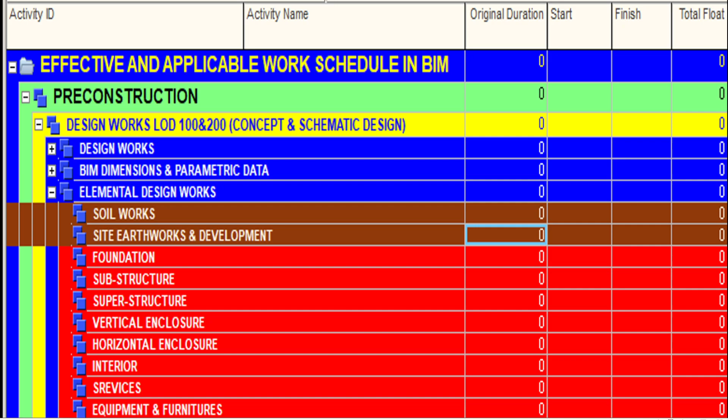Site preparation will consist of the sub-levels of site clearing, site elements demolition, site element relocations, site remediation, and site earthworks.

Site clearing will consist of clearing and grubbing, tree and shrub removal and trimming, and earth stripping and stockpiling.

Site elements demolition consists of utility demolition, infrastructure demolition, and selective site demolition.

Site element relocations consist of utility relocation.

Site remediation will consist of physical decontamination, chemical decontamination, thermal decontamination, biological decontamination, remediation, soil stabilization, site containment, sinkhole remediation, hazardous waste drum handling, contaminated site material removal, and water remediation.

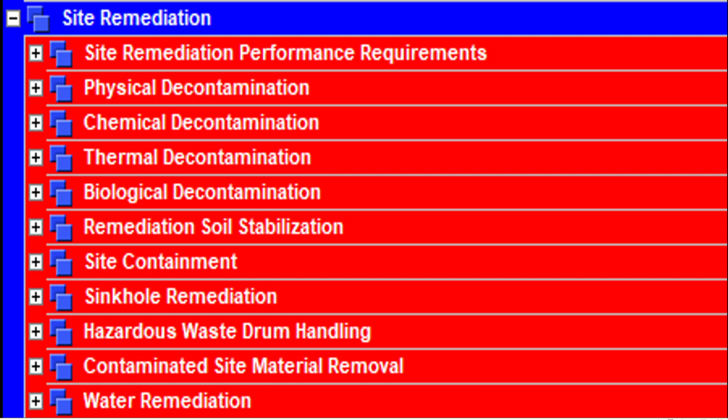Site earthwork will consist of grading, excavation and fill, embankments, erosion and sedimentation controls, soil stabilization, rock stabilization, soil reinforcement, slope protection, gabions, riprap, wetlands, earth dams, and site soil treatment.

Another main level, site improvements, will consist of the following sub-levels: roadways, parking lots, pedestrian plazas and walkways, airfields, athletic and recreational and playfield areas, site development, and landscaping.

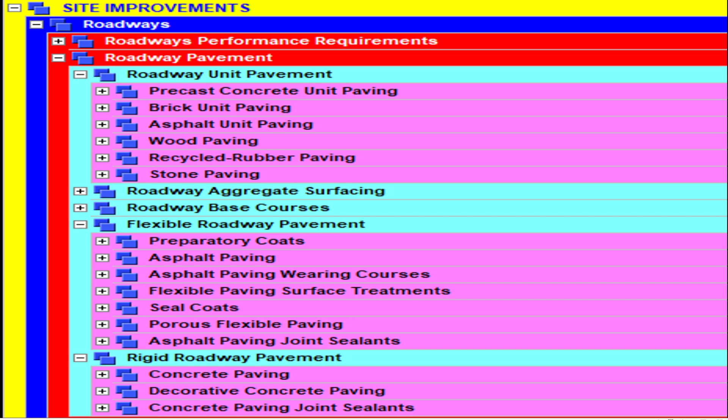Another sub-level, roadway curbs and gutters, will consist of concrete curbs and gutters, asphalt curbs, and stone curbs.

The roadway appurtenances will consist of speed bumps, traffic signage, roadway signaling and control equipment, pavement markings, pavement snow melting systems, and roadway construction.

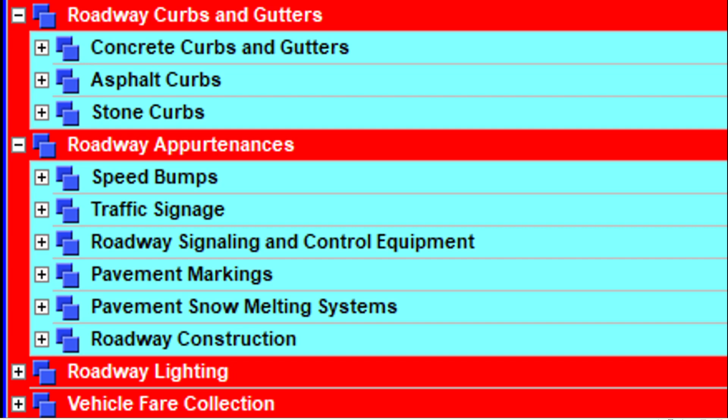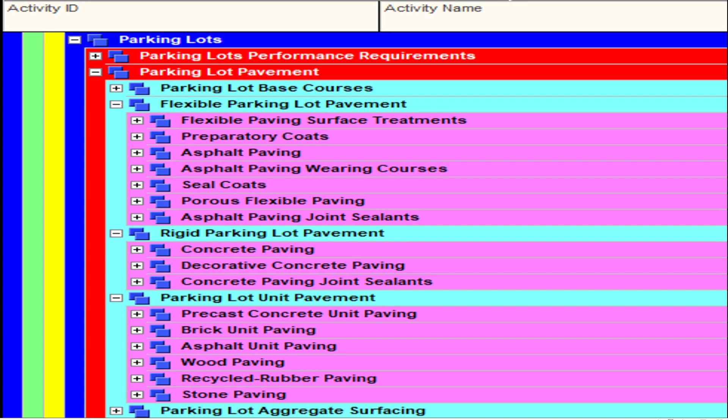The parking lots will consist of the same contents which roadway is consisting. Pedestrian plazas and walkways will also consist of the same contents.

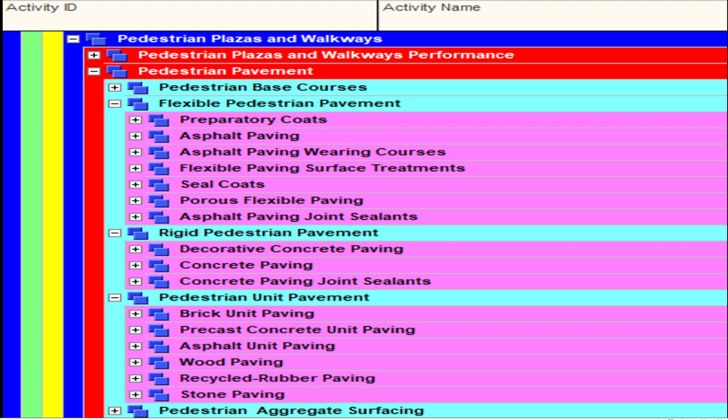But the exterior steps and ramps will consist of metal walkways, stair railings, ladders, snow melting, fire escapes, stair soffits, and stair construction.

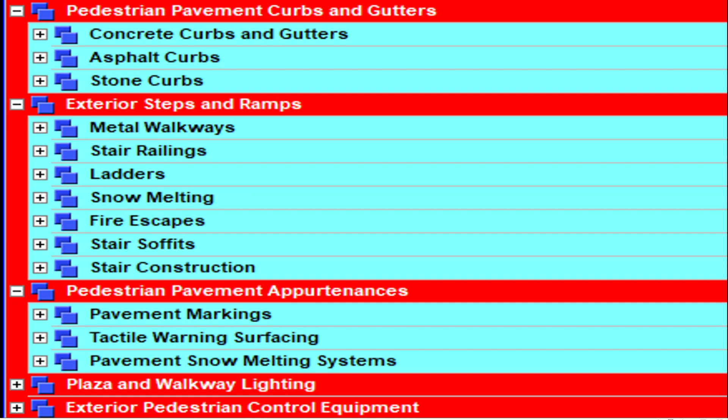Athletic areas will consist of exterior athletic lighting, athletic equipment, athletic court fencing, and athletic surfaces.

While recreational areas will consist of recreational services, recreational court fencing and gates, and recreational area lighting.

And the playfield areas will consist of playfield surfaces, playfield equipment and structures, and playfield lighting.

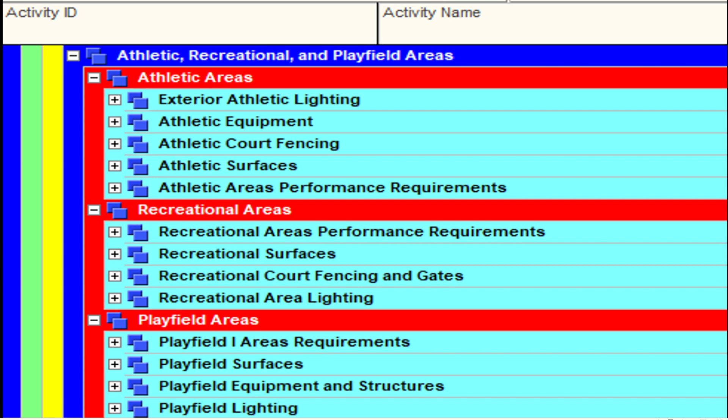The exterior fountains, which is under site development level, will consist of exterior fountain plumbing systems equipment and exterior fountain plumbing piping system.

Fences and gates will consist of gate operators and cattle guards.

And the covers and shelters will consist of protective covers and attendant booths.

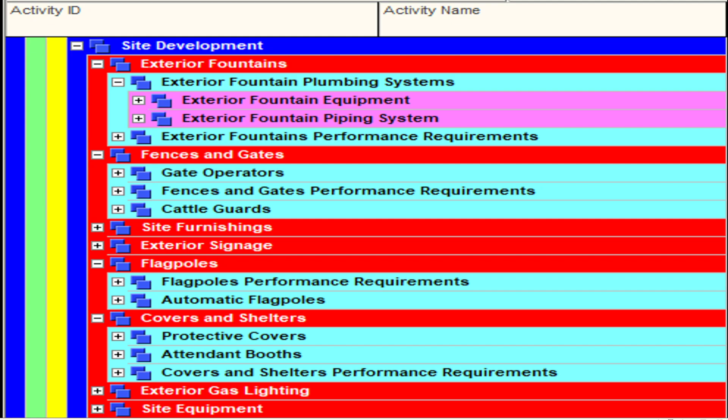Retaining walls will consist of stone retaining walls, soldier beam retaining walls, gabion retaining walls, retaining wall sub-drainage, reinforced soil retaining walls, timber retaining walls, metal crib retaining walls, segmental retaining walls, unit masonry retaining walls, precast concrete retaining walls, and cast-in-place concrete retaining walls.

Site bridges will consist of vehicular bridges by structure and by materials, and pedestrian bridges.

Site screening devices will consist of site specialties, sound barriers, screens and louvers.

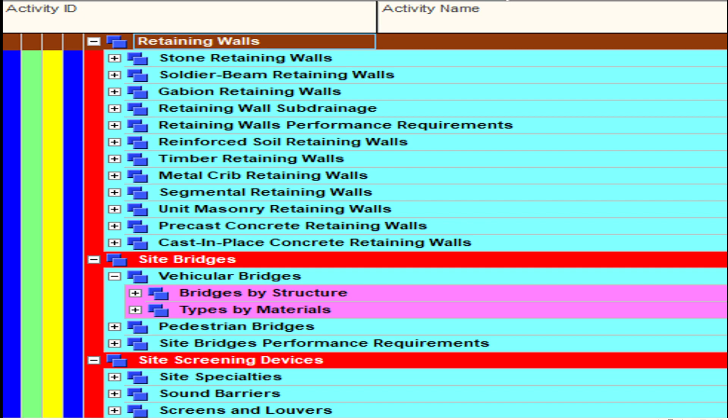Under landscaping, the planting irrigation will consist of sprinkler systems, drip irrigation, and irrigation pumps.

Turf and grasses will consist of sprigging, sodding, seeding, plugging, and hydro mulching.

Plants will consist of plants and bulbs, trees, ground cover, and shrubs.

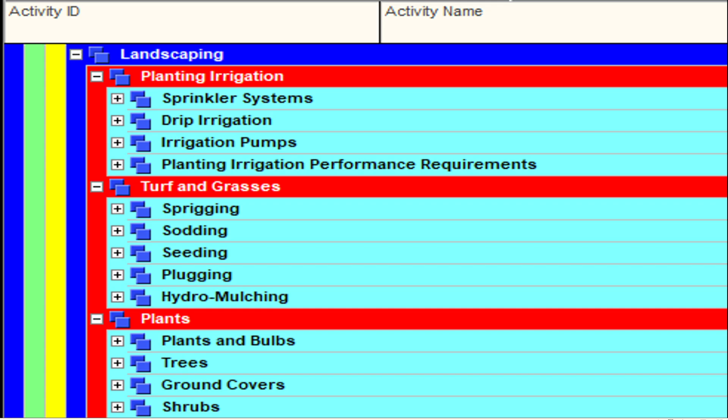Planting accessories include landscape edging, decorative landscape boulders, tree grids, landscape timbers, vertical planting, green facades, green living walls, vertical walls, tree grates, and planters.

And the planting preparation will consist of planting soil stabilization, landscape grading, and soil preparation.

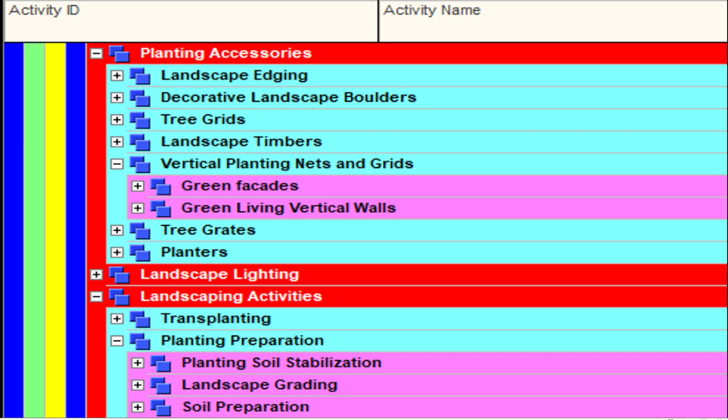Under liquid and gas site utilities, we have the following sub-levels: water utilities, sanitary sewerage utilities, storm drainage utilities, site energy distribution, site fuel distribution, and liquid and gas site utilities supplementary.

Under water utilities we have site domestic water distribution, site fire protection water distribution, and site irrigation water distribution, and those will consist of ponds, storage tanks, disinfecting of water, distribution piping, water supply wells, water distribution equipment, irrigation water wells, water utility service, and reservoirs.

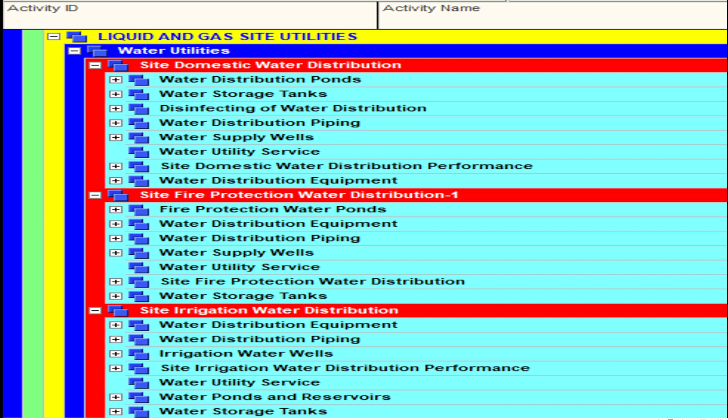Sanitary sewerage utilities will consist of sanitary sewerage utility connection, sanitary sewerage piping, utility septic tanks, sanitary sewerage structures, and sanitary sewerage lagoons.

Storm drainage utilities will consist of storm drainage utility connection, storm drainage piping, culverts, site storm water drains, storm drainage pumps, storm drainage ponds and reservoirs, and site sub-drainage, which consists of drainage layers, sub-drainage piping, geotextile subsurface drainage filtration, underslab drainage, retaining wall drainage, and foundation drainage.

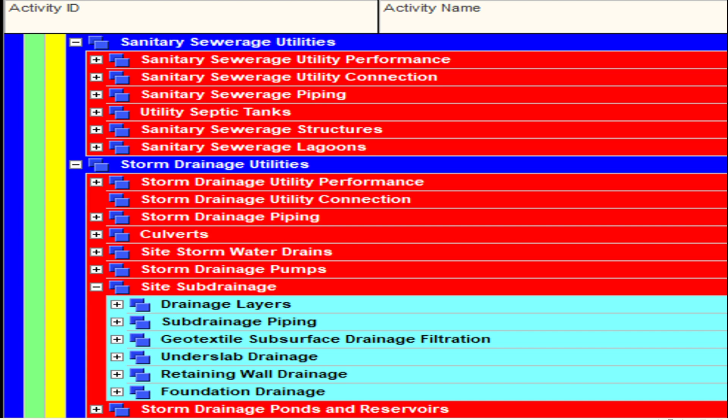Site energy distribution will consist of site hydronic heating distribution above ground and underground, site steam energy distribution, steam and condensate above ground and underground, and site hydronic cooling distribution above ground and underground.

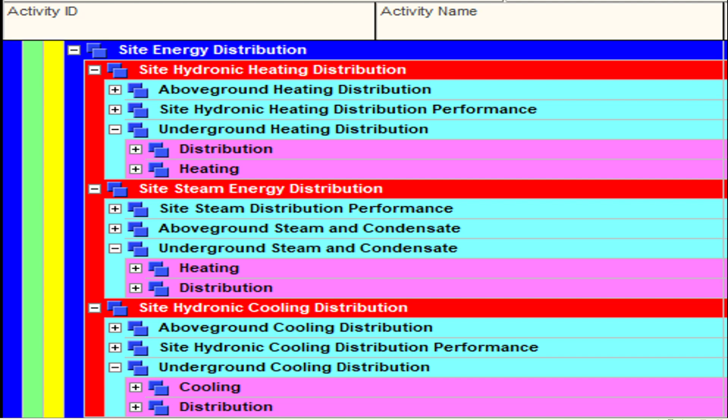Site fuel distribution will consist of site gas distribution, site fuel oil distribution, site gasoline distribution, and site diesel fuel distribution, and every one of those will consist of storage tanks, pumps, and piping.

And the liquid and gas site utilities supplementary will consist of manholes and structures, utility structures, pressure piping tied joint restraint system, trenchless utility installations, utility identification, and instrumentation and control.

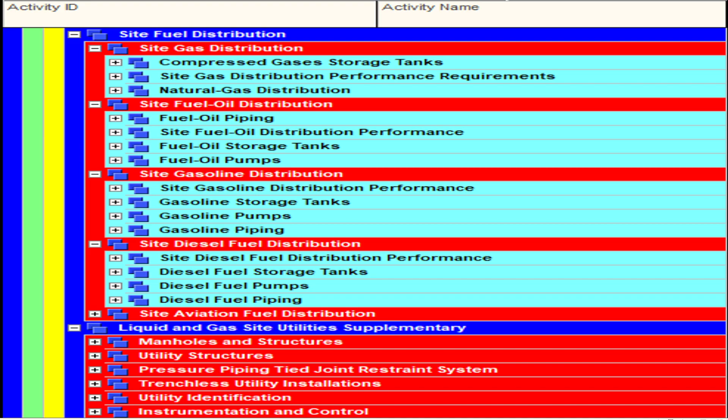Electrical site improvements have two main sub-levels: site electric distribution systems and site lighting.

Site electric distribution systems will consist of electrical utility services, electric transmission and distribution, electrical substations, electrical transformers, electrical switchgear and protection devices, site grounding, and electrical distribution system instrumentation.

The electrical transmission and distribution will consist of transmission and distribution equipment, insulators and fittings, wiring, underground ducts and manholes, direct current transmission, electrical utility poles, electrical utility towers, and transmission and distribution specialties.

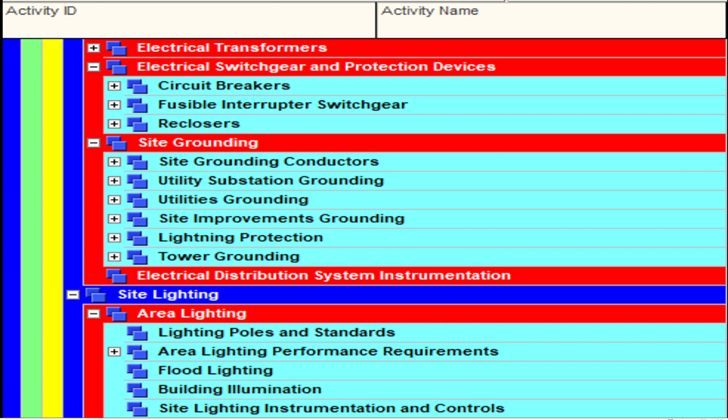The main sub-levels of site communications are site communication systems and site electronic safety and security systems.

Site communications systems will consist of site communications structures, wireless communications distribution, site communications distribution which consists of copper communications distribution cabling, optical fiber communications distribution, grounding and bonding for communications, cable pressurization equipment, coaxial communications distribution cabling, and cleaning, lubrication, and restoration chemicals.

While the site electronic safety and security systems will consist of access control and intrusion, electronic surveillance, detection and alarm, and electronic monitoring and control.